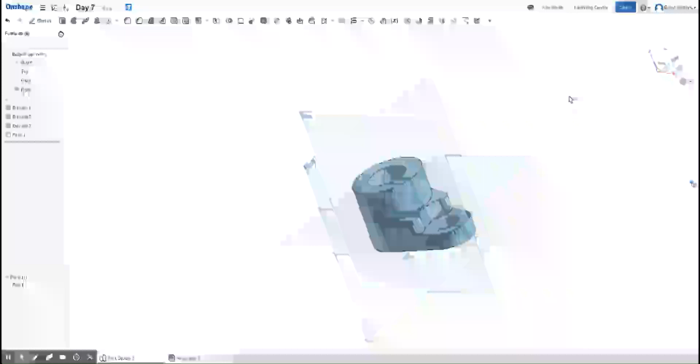All right, day 7, part 2. We're going to create the thing that you see in front of you, this wonky shaped circular part.

So there's a couple things I want to draw your attention to. They show two methods of how to create this. I'm going to do the first method. Feel free to play around with the second method if you'd like, but in the interest of time, I'm just going to do the first method.

So I'm going to create a part studio. You should do the same thing. Instead of creating another document, calling it day 7 part 2 or anything like that, just create another part studio and put your drawing in there. You'll notice I have 3 because I have the one that I already created. You should only have 2.

So here we go. It tells you a few of the design parameters up front, and I'm going to read them to you because they are important. The 2 cylinders should be connected smoothly. If one of the cylinders becomes bigger, the part should still connect to the other cylinder smoothly, meaning that the circles need to be constrained to each other. So if one side gets bigger, then the other side also needs to adjust. The 3 sections of the part have 3 different heights, which we'll satisfy towards the end.

And then this one's very important. If you don't pay attention to it, then you'll get to the bottom of this and be like, crap, I have to do everything over again. The part should be symmetrical across the front plane. So if you change one side of the part, the other side should change as well.

And if you look at the image, it's very important to note that we've been sketching a lot of things on the front plane, but it's actually the top plane that we're going to be sketching on. The reason why is because that's going to serve as our base for the sketch. It's really important because we're going to be extruding up and down instead of out or revolving, so we use the top plane. That's a lot of times the preference for designers, to use the top plane as the base essentially of things.

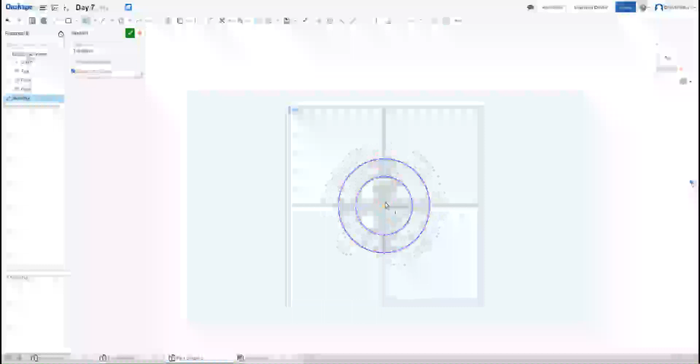I'm going to do a center point circle here. I'm going to do another center point circle here. And then I'm going to use auto inferencing, very important. I'm going to go along here, create another center point circle here, and another center point circle here.

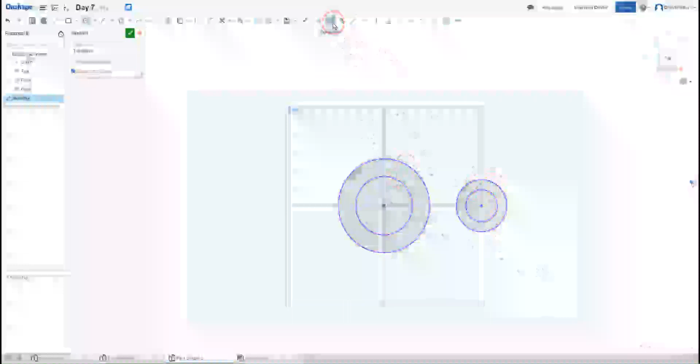And just to be safe, I'm going to make sure these circles are concentric. I'm going to make sure those circles are, again, concentric. So I've made sure they're concentric, and now I need to draw a line connecting the two.

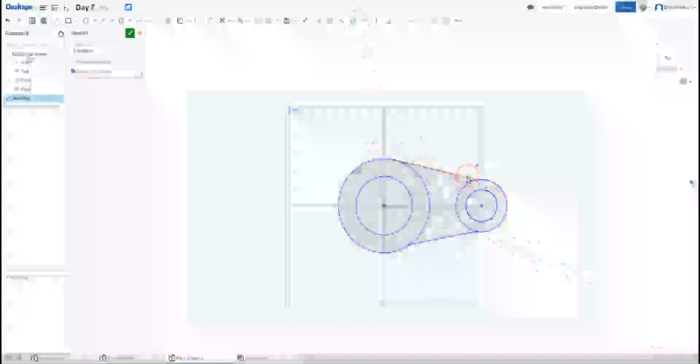So I'm going to go here to here, and I'm going to go here to here. Now, also very important, these lines have to be tangent to the circles. So I'm going to select this circle, select the line. It needs to be tangent. You'll notice it bumped it up a little bit. Same thing here, line needs to be tangent to this circle, tangent.

Now you notice that it shrank the circle a little bit. Again, that's due to me constraining it. Tangent and tangent. All right, so now we've got these circles.

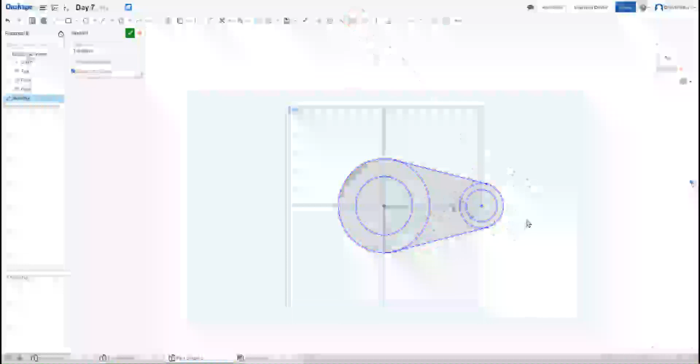It may not look exactly like what they have there, but that's okay because we are going to dimension it anyways.

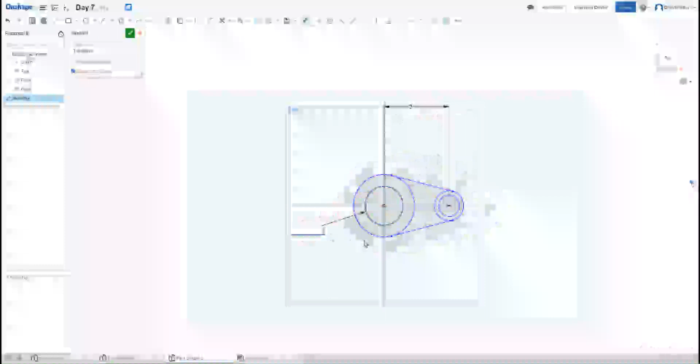So here we go, I'm going to dimension this to this. Should be exactly 2 inches, and that shrinks my whole thing down. This one diameter is 1.25. This one diameter is 2.25, notice that bumps things up a little bit. This one diameter is 1.5, and this one is 0.75. Boom, fully constrained, exactly like we like to see.

So that's all done. Now it's time to move on.

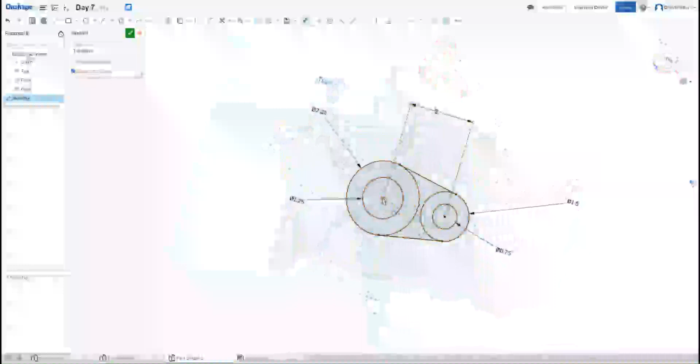If you aren't fully constrained, the problems I tend to have are: A, if you didn't auto inference this circle to the origin, you will run into problems. So if you're not getting these tangent lines to lock into place, then it's more than likely because you didn't auto inference this. You may have to delete it, go back, auto inference it, or use the midpoint or other lines to make sure that it's correct.

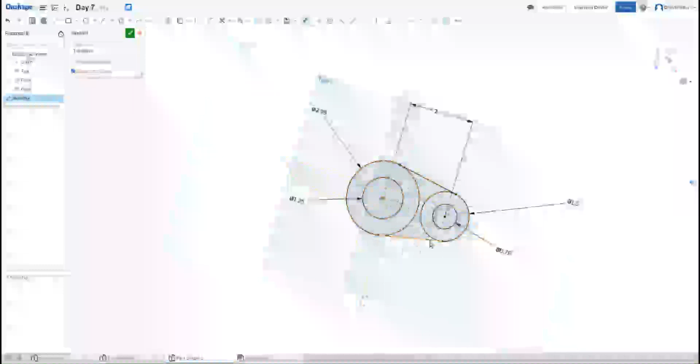You could even draw a construction line if you wanted to make sure they're all lined up, but you need to make sure that this is auto inferenced from the origin. And then you need to make sure these lines are actually tangent to both the circles on both sides. So, all right, I've got that done.

I'm going to complete that sketch, and we're going to go back to a slightly different view here. Let me see if I can get back. Yep, there we go. So what you'll see here is I have everything done, and this is our first method that they show of extruding this.

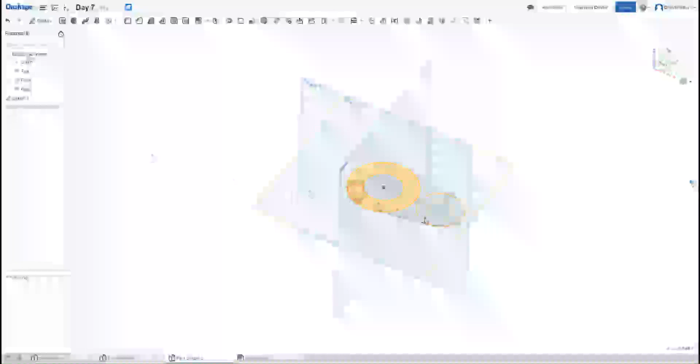So I'm going to select this, and this, and I'm going to extrude downwards. I'm going to click that arrow, it will flip it around. It's going to be 1 inch. I'm going to accept. So you'll notice that if I look at this, it's actually coming off the bottom of the plane rather than the top.

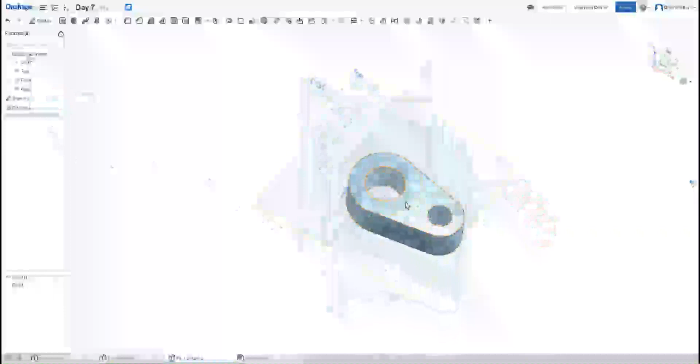Now, I need to still use other parts of the sketch, so I'm going to click on this eye. It makes the sketch visible again. I'm going to click on this guy, and I'm going to extrude him by 1 inch, which is fine. And then I'm going to remove a half inch of this guy, so it's going to be a remove and 0.5. There we go, accept, and I'm almost done.

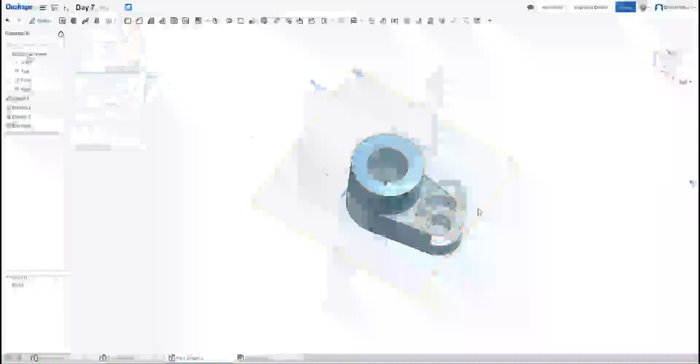So I'm going to hide this sketch again now that I no longer need it. You can see the only thing I need to do is round off these corners with a fillet. So I'm going to do fillet, select, and this is supposed to be a quarter inch fillet, so 0.25, and there you have it.

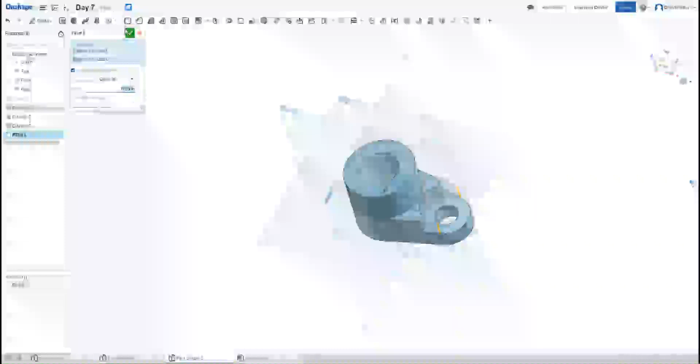Nice and easy, didn't take very long. As long as you pay attention to what you're constraining and the auto constraining, then you will be fine. If you want to play around with the other method, feel free to. Just make sure you have this completed in your document.